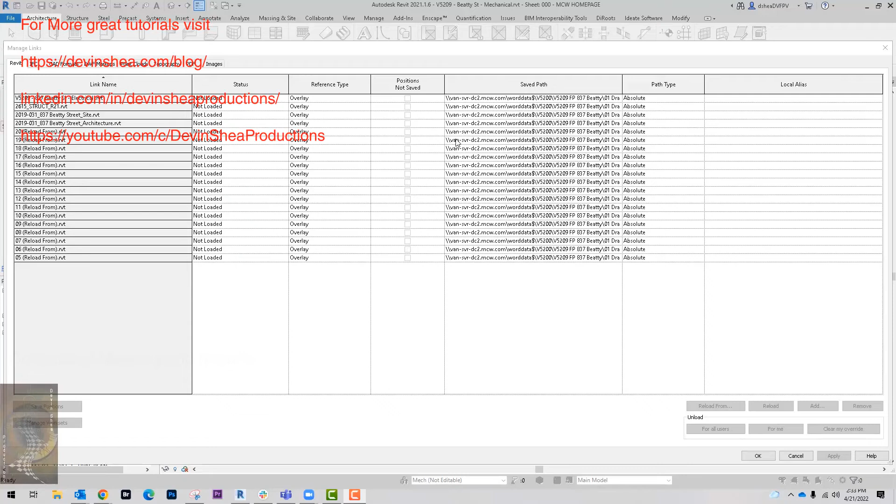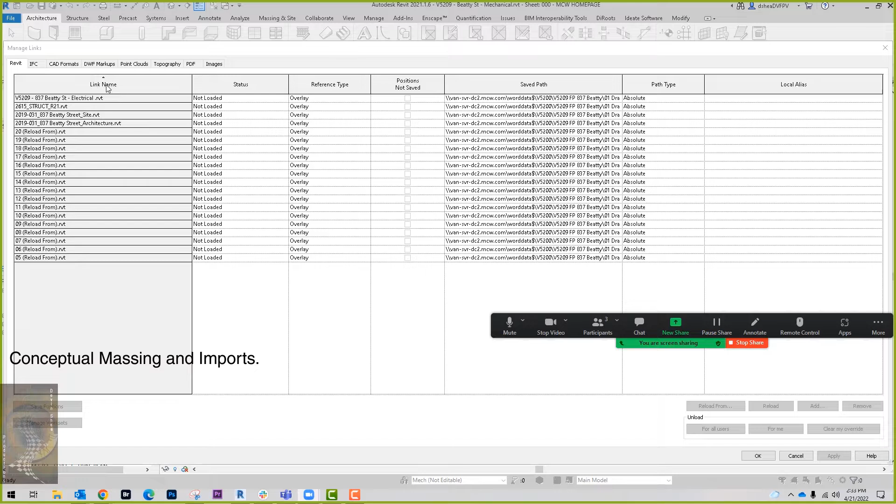Okay, yeah, I got you. Thanks for your patience. I was just on the phone with Tim, and he's getting us the drawing review tomorrow. Oh, that's great, so he had it and they were working on it, but he hadn't really responded. Good job, Tim.

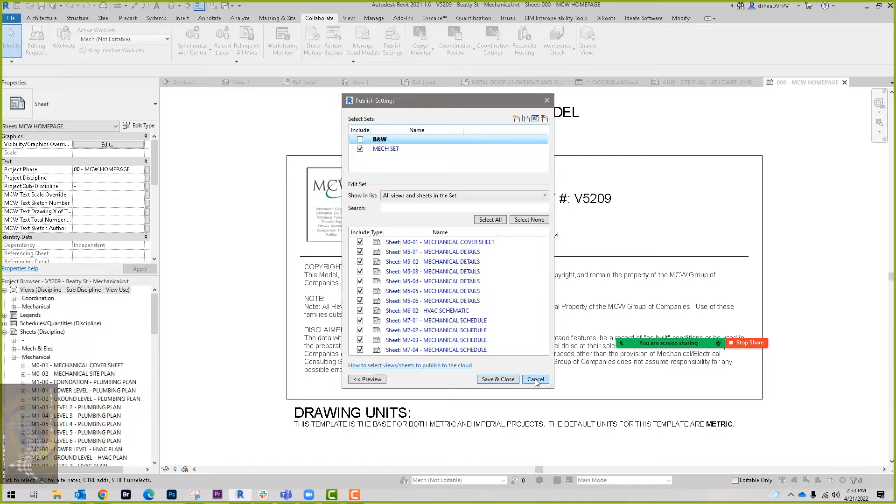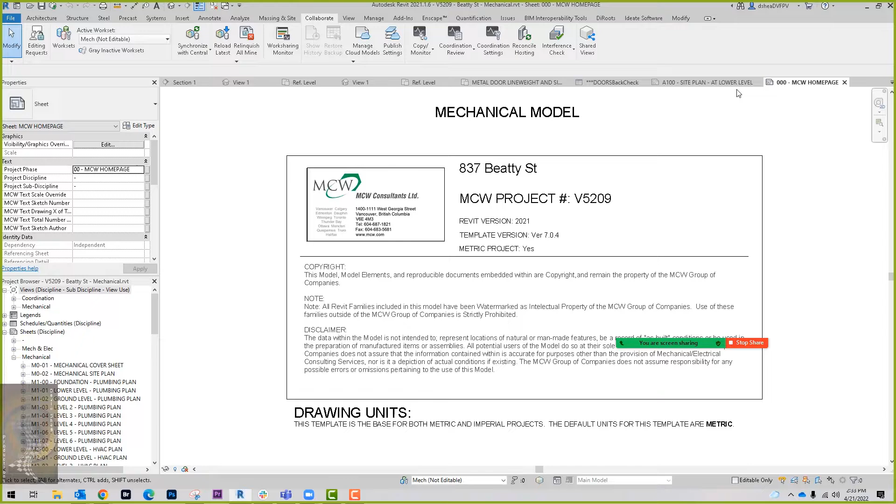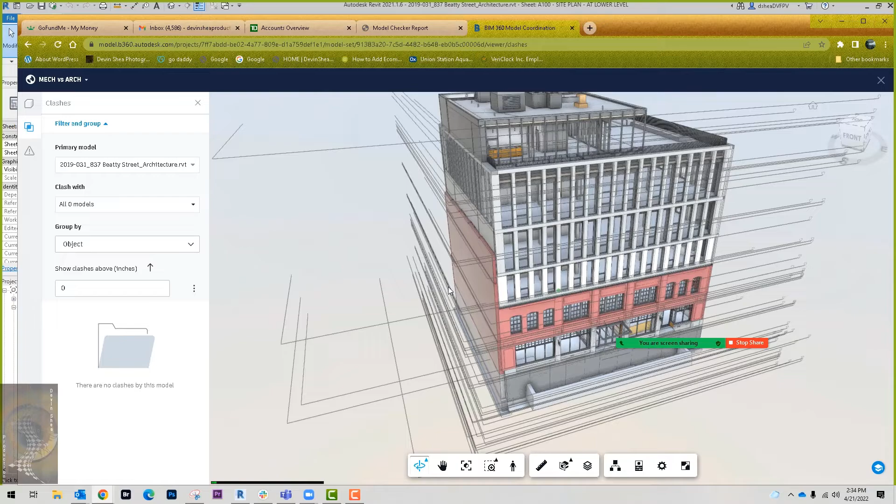Devin, thanks for making some time to chat with us, and I think Mike's joining as well. We recently had a whole series of updated consultant models, and you were helpfully getting them in order for us. I wanted to make sure we understood the process you were using for mechanical and electrical, which I think is one process, and then structural, which is a different process using more advanced BIM 360 capabilities we hadn't really explored as a team before. I thought it was important for Rocio and I to understand it, since Rocio has primarily been managing the consultant models for the life of the project, and we may have more coordination to do as we get into IFC and throughout CA. I was hoping you could walk us through and let us ask questions. Mike, I don't know if you have anything to add.

I think the process works going further as well. I'm just kind of going into this cold here. Devin and I haven't had a chance to catch up. So yeah, go ahead, Devin.

First of all, I'm glad you asked, because you guys have had this thing going just because of COVID, and it's basically the most advanced construction collaboration system on the earth, and I like it a whole bunch, don't I, Mike?

Yep. So anyway, also, is it okay if I record this? I've been wanting to show this process to other people as well, so figured it'd be a good opportunity to record if that's okay with you guys. It's fine with me. Yeah.

Okay, so first of all, just to really quickly fly through the document management system. Basically, when we set up the cloud, we set up teams, and then we assign each team to specific people. You can do different permission things so they can't download ours, or we can't download theirs, or vice versa. Once you set this up, we also have design collaboration, model collaboration, and this insight thing, which just shows you statistics about boring stuff.

And then when you go up here to this manage cloud model - every time, it's Ryan, right, with Fast + Epp, is his name, right? Yep. I always get my two structural guys confused because we have another project with another structural guy that wants this too.

But you just go up here and press this button right here, which means if there's any changes in the model, it will publish the new sheets and that 3D view, and then it goes up to the cloud.

So you just have to hit two buttons, and then you come over here, and whenever you hit that button, you see these little buttons, these little circle things. Can you see my screen? So every time we press publish, this little circle will show up.

And then the structural team - notice there's only us and the structural guy having these up here. So we just click this button right here, which means create a package. And then you go down here and you can add whatever you want to the package.

Oh, come on, weak. Sorry. Got signed out.

Come back over here. Okay, so I press the button, and then you go over here. The easiest way is just to go to your sets and then press this button, and that's all I did for Ryan the other day.

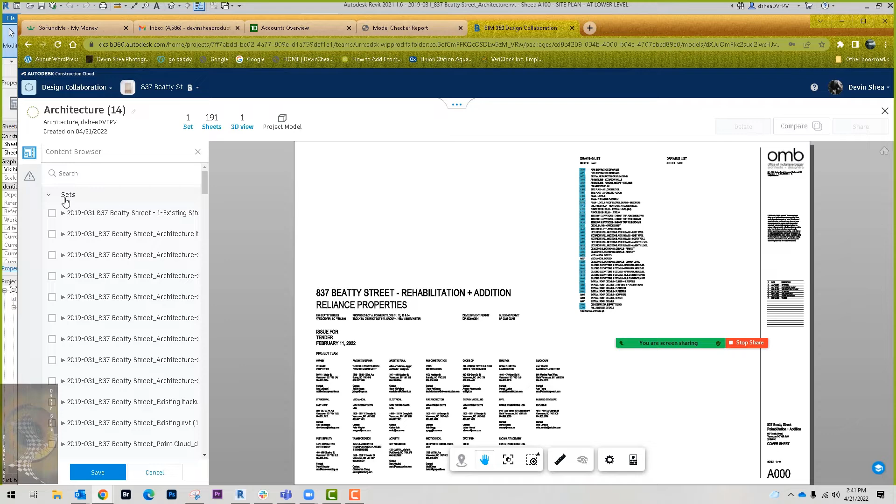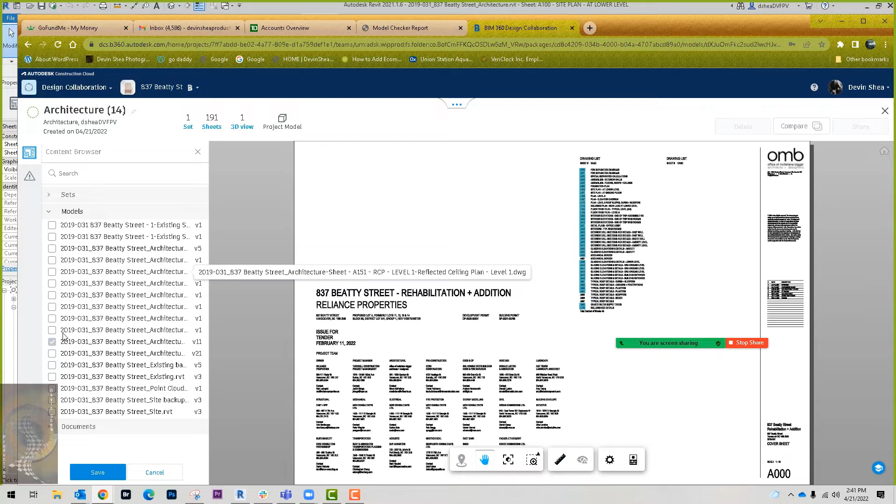But notice how in here, you can add all this stuff from AutoCAD drawings and things that are hanging out in the cloud. So you can add basically any of these things, and when I say add the model, this is just the 3D model with that 3D view that will show up in the cloud.

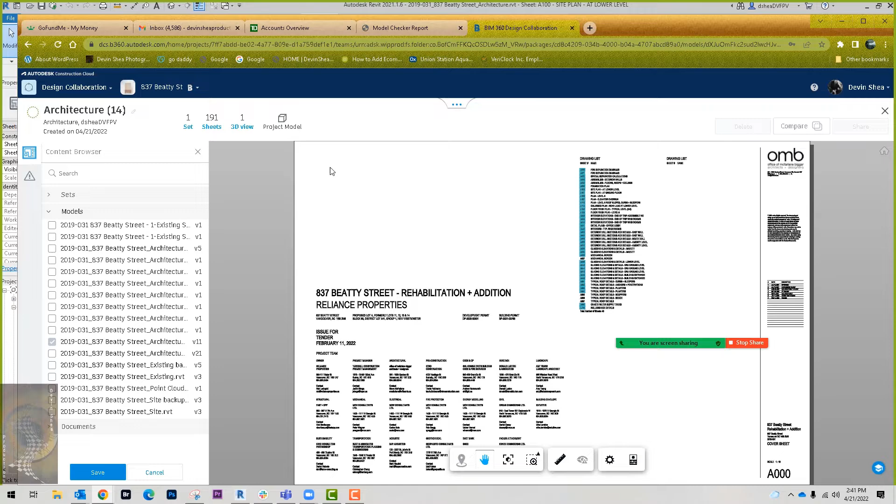And if I press this button - shut up - if I press this button, it goes to the 3D model of the project. So this is that 3D coordination view that I have set up.

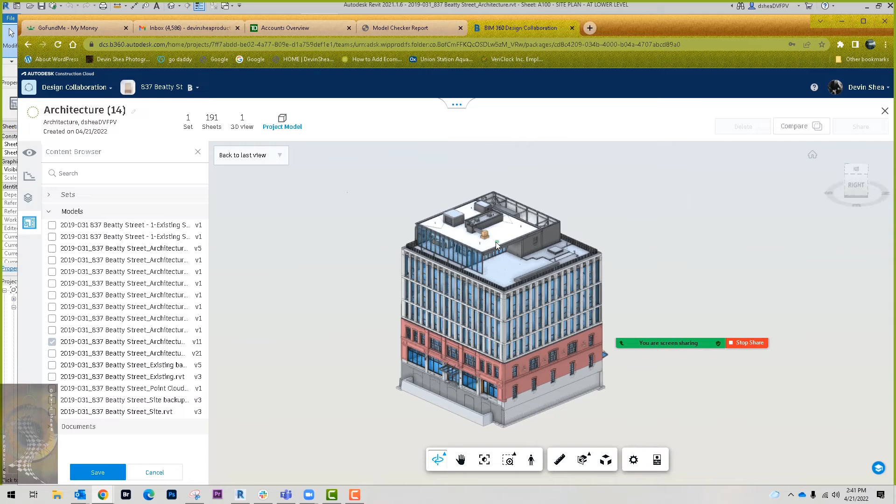Notice how you can't see any of the mechanical or anything because I had those turned off in my view. So also anyone that's in the project can go to the document management after you publish it, because you just have to press that button that sends it up to the cloud.

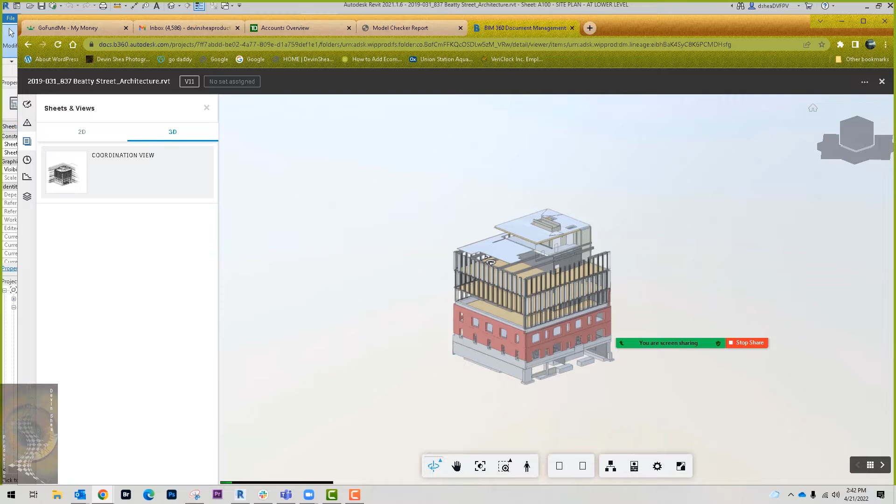So if I just go over here and click on your file, it will have the 3D coordination view right here, and then it will have all the sheets and stuff as well. So this is how you use the cloud for CA.

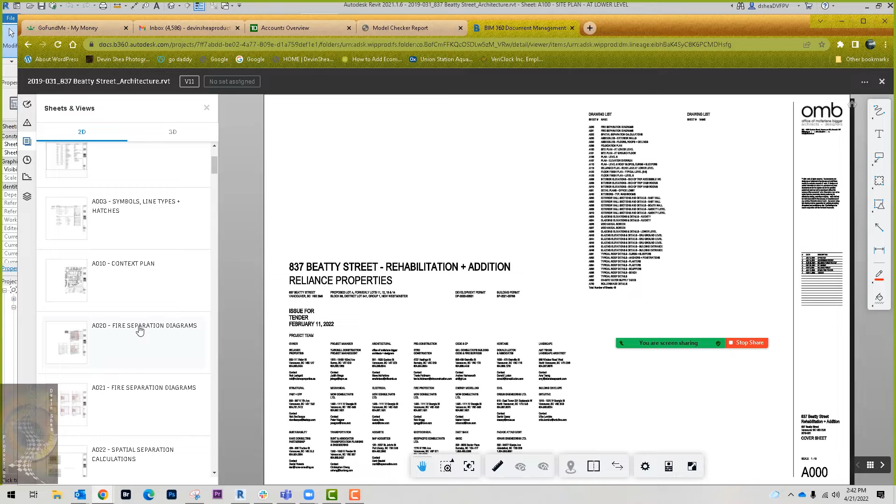Because I can just go here, and when I click on this, it's basically a copy. It's like a PDF, but it's way smarter than a PDF. So you can go up here, I'll just click this guy, and what you can do - see how I'm clicking things in here?

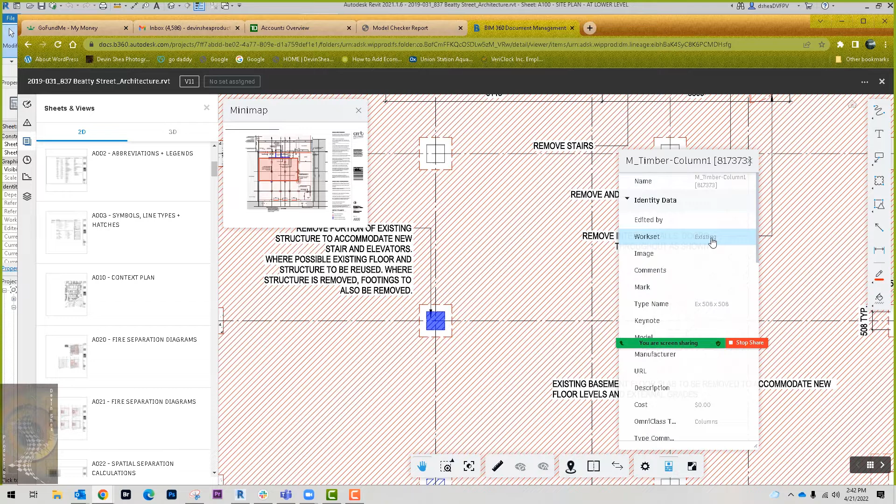So you can actually click on things that are coming from the model. So this is a floor plan. I can click this thing here, and I can go to properties, phasing, and then it literally tells me what phase it's on, what information it is, what size of the column, yada yada yada.

So this is kind of just like using Bluebeam, but it's way better because you're actually kind of interacting with it live. So it's like a PDF, but it's way smarter.

So any of your project team, the mechanical and electrical guys, even though they don't have that extra open-it-from-the-cloud thing that costs another $1,000, they can still go in here and look at the stuff.

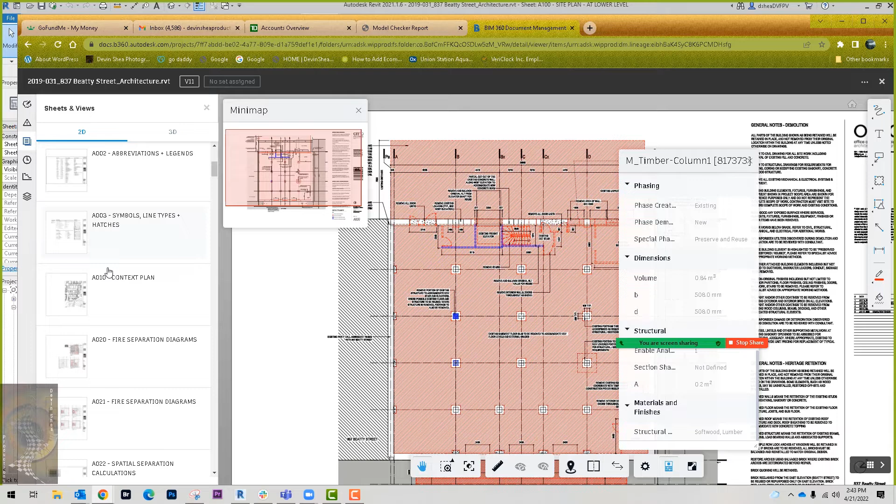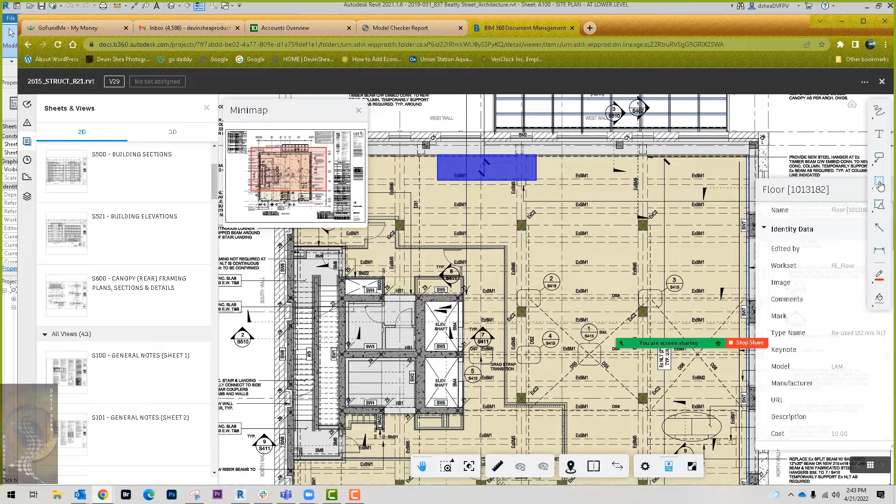So if I go on the flip side, if I go down here to structural and I click on this, these are all his sheets right here. So I can just quickly go into his sheets, click on that, go to here, and then you can also put markups and stuff like that.

And if we go back to ours, see how this has markups and issues right here? Do you guys remember making markups and issues on that? That was a trick question. I did that, I was just trying to show you what that was.

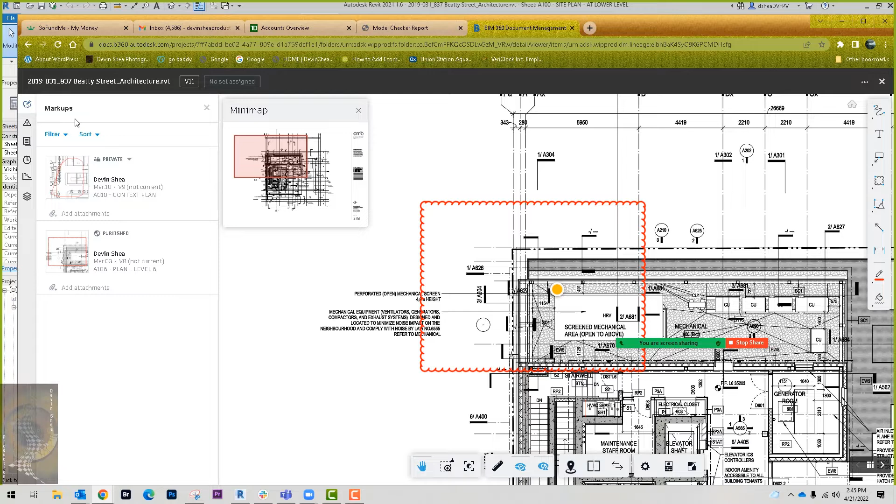But whenever I click it on here and I go to issues, see how I just, hey Brian, see how cool I am? So I sent you this a long time ago because I just wanted you to look at it. In here you can do, it's just like Bluebeam, but it's way smarter because I can literally put a little dot on here, and here's the markup. Then you click this little dot, and you can come up here and type a response or whatever, and the cloud remembers all of these issues and markups. So here is a couple markups that I just made a while ago.

Circle. So that's pretty much it. If you were using this for CA, it's a little bit more involved because you have to know how to manage your markups and your issues and stuff like that.

Hey Devin, on those BIM 360 sheets, how do you convert those to PDFs? You just press print.

Come up here. There's somewhere there's a print button. I haven't done it in a while. But yeah, you can just, sorry, yeah, somewhere in there's just a simple print function. I think it's export actually.

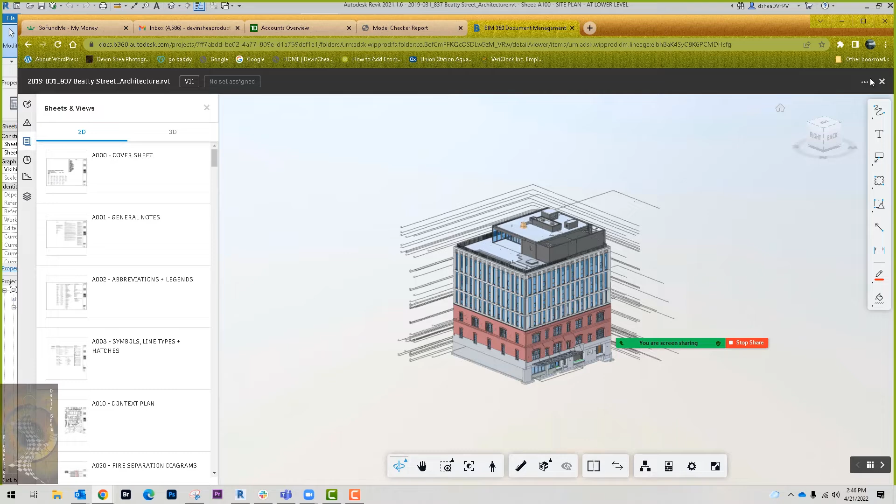Yeah, I'm not sure you can. It would be new if there was that feature, but yeah, I think it's one of those Autodesk things that is pretty contained within their sandbox. Oh okay, I think you have to add that to the plans, or yeah, when you make a, yeah okay. Anyway, we'll cross that bridge when we get there.

This is how you set up a transmittal. So you can just e-transmit that through the plans, but you have to have that set up in plans, I believe.

So I can go create transmittals, architecture, this one. Okay, I guess you can do it this way too. And this would send a transmittal, and then it would send whatever sheets you have in your set that we published.

So I don't still understand, like when Ryan tells us that they have a new model, usually he sends us some kind of BIM 360 link, right? Yeah sorry, I forgot that part. Or does he just tell us that they've published a new model?

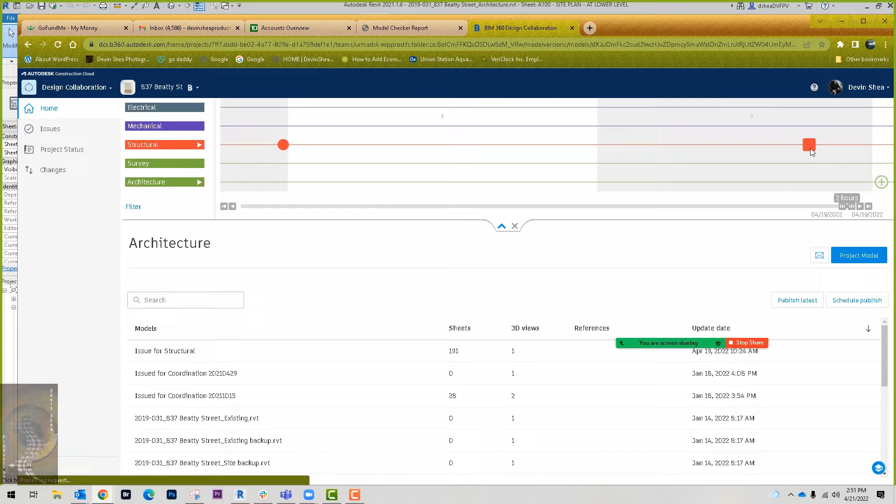But you have to manually go up here through the design collaboration tab and share. So when I click on this guy here... whenever he sends you that email, basically he's saying that I published a new one, or a package for you, and the square means that is the package that he sent.

See how it says consumed on 4/19? All I did is I went in here and clicked the square, and when you do it for the first time, there's a button that will show up saying consume. You just click that button and it automatically downloads that into the folder we were just looking at - though to clarify, it doesn't actually download, it just moves it in the BIM 360 folders in the cloud, nothing downloaded yet.

The intent there is that because the folder that lives in the structural folder is actually structural's file, we have control over when we update our version of their file. We can elect to consume it right when they issue it, or the following week, or whenever we want. It will only update in our model once we consume the package.

A point of clarification: that particular file that Structural has published for us to consume isn't their working model. It is their published version - in the same manner that we prepared a consumable package for Structural, they're preparing a package for us to consume. So it is a copy of their model, not a live link.

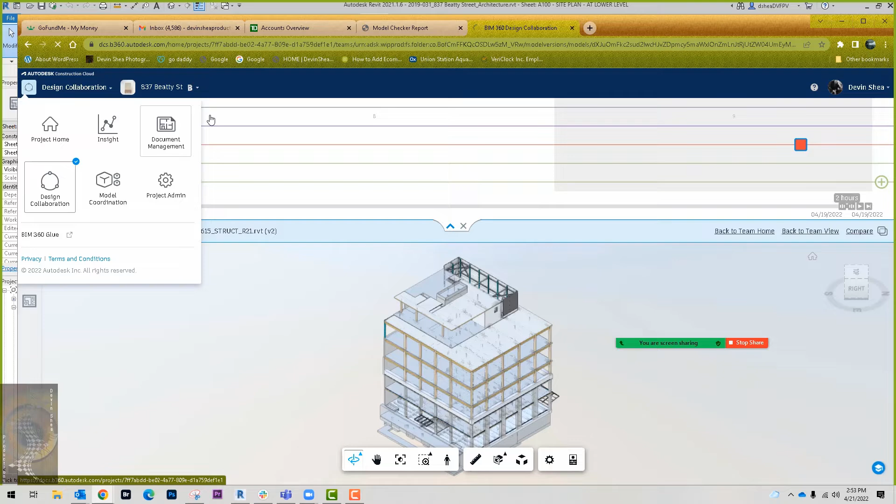In that case, what is the advantage between not using... if I understand, the model that is in the structural folder that is not in the consume folder is the published package for us to use. So what is the advantage between not using that one like before, and now having to go to design collaboration and push, being aware if we clicked the square so we're working with the latest model, versus relying on the original file that updates automatically as soon as you open it with Revit?

Do you guys remember that one time where he freaked out because I was messing with his file? Remember that, Brian? I do. The reason I was messing with that is because - I'm not supposed to be able to go in and open his file, normally we have restrictions on that. So that's why he was like 'what are you doing?' I said 'oh I'm sorry, that is your live file,' because it was linked to that one. So I thought that's why I got all confused.

But so the difference is, technically we're not supposed to be able to open his file - that's a permission thing. So therefore you never link to his file, because he might be working on it, and if we hit refresh reload while he's in the process of changing an entire parkade floor ramp, and that ramp disappears, we'd be like 'what the hell, where'd this ramp go?' Oh, I was not working on that.

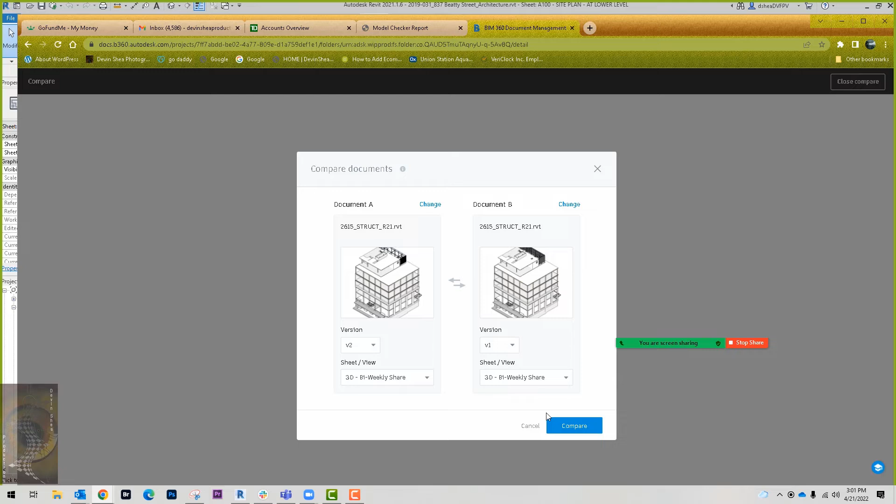I always like the compare versions feature here because you can literally go in and see how he set up his weekly share. The nice thing about the cloud is it saves everything, so every time we press publish, it tells you what's added or removed between sessions.

So sometimes you get into those little arguments like, I swear I put that up there, and yeah, I'll fix that. But you can literally go back here and see, oh, on this date this truss was removed, and that's why it's messed up, and then they'll write that down and go fix it.

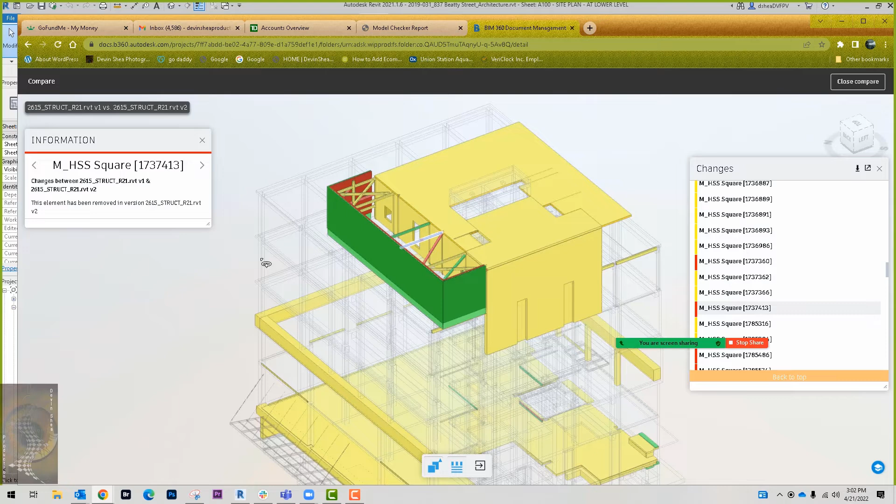But these things are really nice. To support what Devin's saying, because you can't delete what's been published and consumed, in combination with this comparison, there's a level of accountability that's trackable.

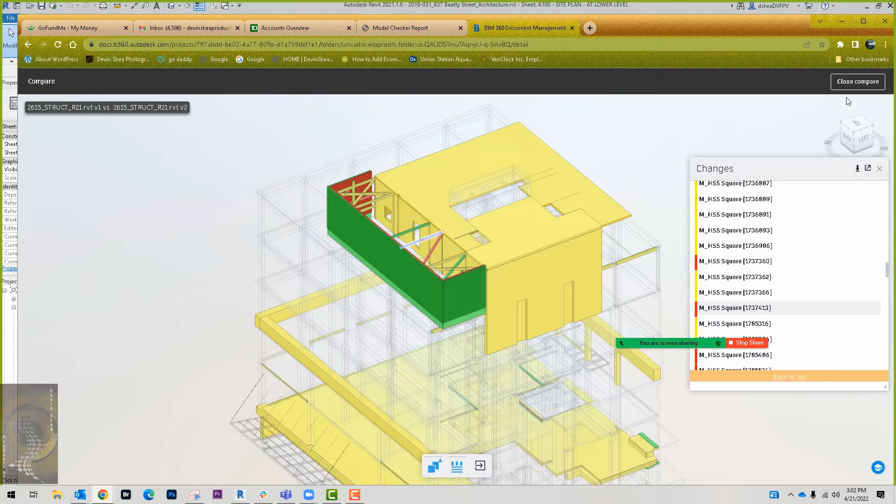So this is kind of like the list of changes or revisions in one image. Because those lovely conversations where you're always like, no, you were supposed to do that, I was supposed to do this, you've been in one of those arguments before, right? This allows you to go back and say, oh look, that was actually deleted by you. So those are the fun conversations you get into.

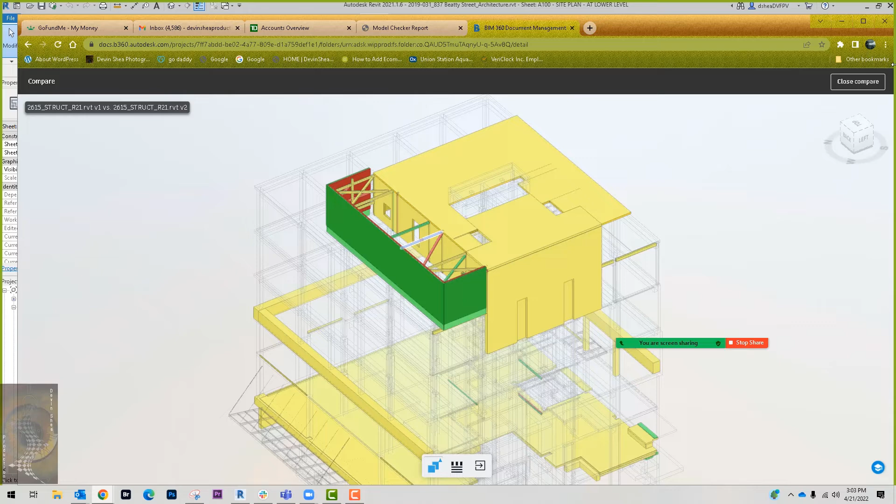And on ours we can do that as well, so you can go back here. These are all of the versions we have. Technically there's like 25 or 30 of these, but this is the one that I accidentally overwrote and killed the version history, and Mike was not happy with me on that one.

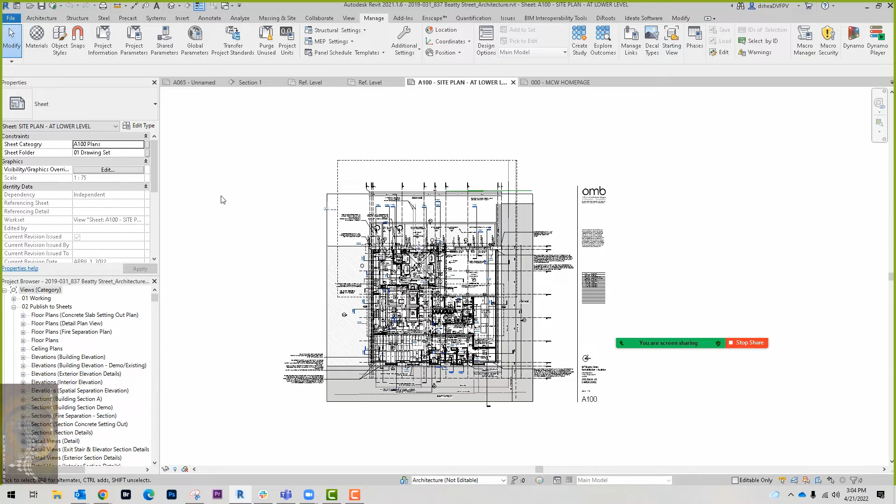And then you just have to reload your link, through Revit, reload the link, just refresh that. All your versioning is sitting there, so you don't need to worry about renaming files or anything, if it's a Revit user that uses BIM 360. It's all just sitting there ready for you in the ideal world where everyone uses BIM 360, but we're not there yet.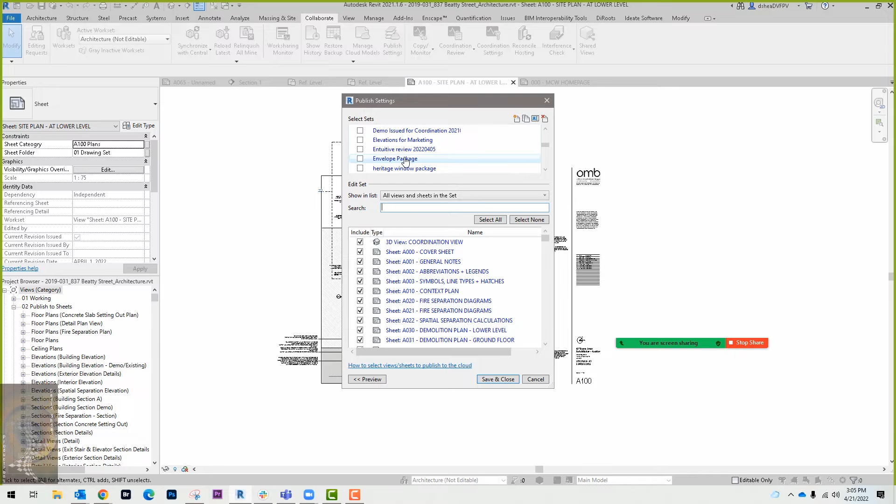Thanks, okay, so it's the day that we're transmitting models, and I or Rocio can do this as well. So I go into publish settings first, and since you guys aren't using the 2D sheets, you really don't even need to do this part. But as long as you have this view set up, that's the important one, because that's the 3D view that shows up on the cloud. We're also setting that up, I had it set up with clash detection, but they deleted my view in the mechanical and electrical.

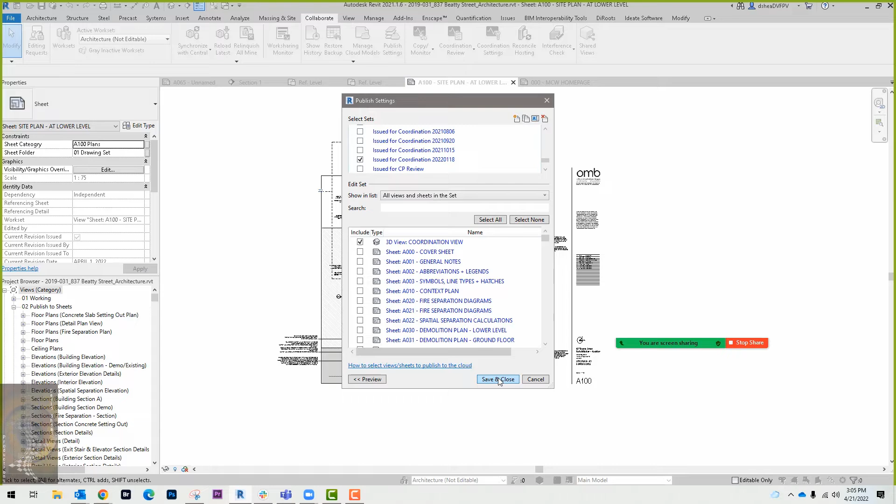So then you would go, okay, I'm doing issue, this one, whatever, save and close. So would we create a new issue every time that we publish? No, you don't need to do that.

So if you are using 2D sheets instead of Bluebeam, then you have to do that, because when you're doing an addendum you're only sending out like 6 sheets or whatever, so you just want those showing up in that addendum. So you would do that, because it would show on the cloud what sheets are in addendum 3 versus IFC or whatever.

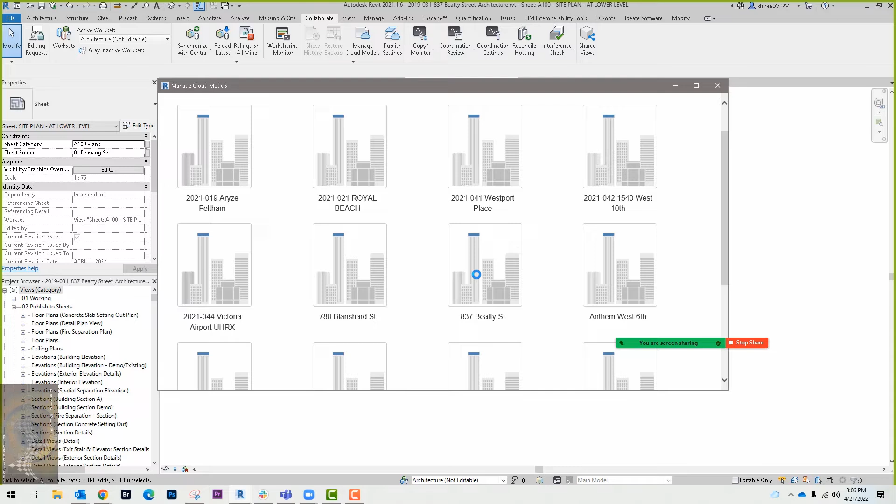Really you don't have to do anything, because I already have it turned on for you. So you just go up here to Manage Cloud Models. Step 1, go to Manage Cloud Models. Go to your project, which you should only have one in your dashboard, because I'm just on every project. So you go to your project, and you go here, you hit this little button.

This first file that you are hitting is the backup, so you go to the second line. Oh yes, sorry, good eye.

So yeah, see that little up arrow thing? That will publish your changes.

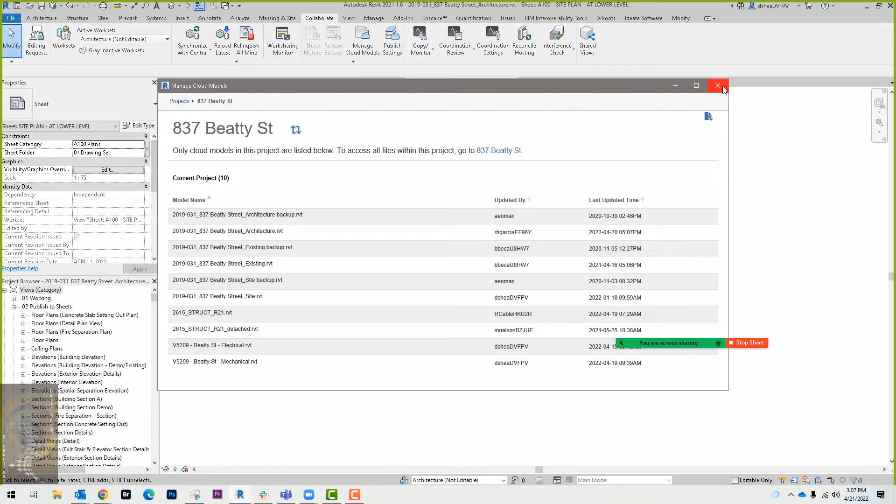So for instance, in my 3D model or whichever 3D view I have set up, let's say you put in a Ferris wheel inside your model, because I actually worked on a project and we put a Ferris wheel in there. You have to have that visible, or else you can't see it on the cloud, and he can't see the Ferris wheel until you go up here and hit this Manage Cloud Model button, and then send it to the cloud for publishing, basically.

So you go in here, go to Beatty Street, go to your model, hit that up arrow, and then it goes up to the cloud and takes a minute to process. Normally you do this the day before, and it will be done when you come in the next day. Usually it only takes about 30 minutes to an hour.

So there'll be a little spinny wheel right here that tells you it's still processing. Once that's done spinning, you go over here to the Design Collaboration tab. Every time you press that button, you always have to hit this thing up here to make the timeline pop down, and then every time you press that button, it gives you this little thing.

Zoom in. So this is just a 421. Did anybody press that button today, or I guess not? This just tells you that there are changes or whatever. I did that because I pressed this button, possibly because I had not been working on Revit today.

Okay, I think that was because I hit this button earlier. But anyway, you see this little plus button, which means create a new package. I was in Revit and did sync, and that makes the circle dashed. But when we press the Manage Cloud Model up arrow thing, it becomes a solid circle, and when you press Create a Package, it becomes a square.

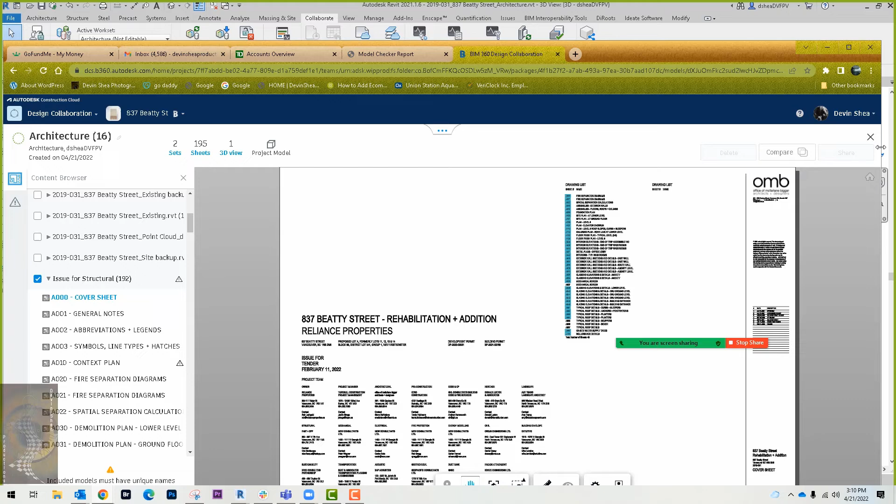Anyway, so you click this and then you hit this share button and you're done. So you go up here to Design Collaboration, hit this plus. All you do: rewind again, Manage Cloud Models, hit the up button, go to your Design Collaboration, hit this square, select what set or model you want to send him, and then press share. Then he comes along and presses the consume button, right here, and in the opposite way he just presses consume, it copies it over to his consume folder, then he goes into Revit, reloads that link, and you're done.

So the whole process takes you about 2 minutes once you've done it a couple times.

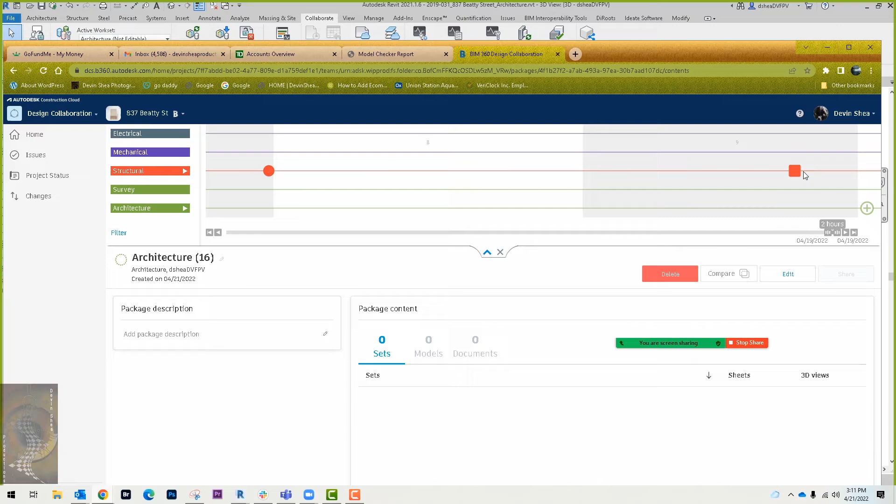When we are bringing the updated structural model, it's exactly the same process, but in that case you will have the structural label here with that square button, and we just press that button. You go up here and literally click it like this. I've already consumed it, that's why it's not showing up right here. When you click this square, you'll see consume right here, and all you do is click the button and it does it all for you.

And then you just have to reload your link in Revit. And I can write down all the steps for you if you want. Mechanical and electrical, that is a different system. We are still doing...

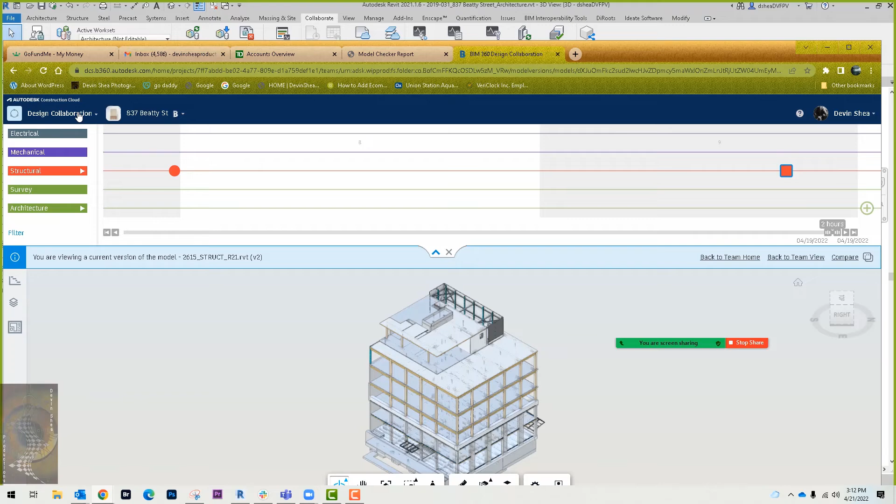So I understand that the thing we have been doing is whenever we receive the model from Dropbox, you are just uploading it into the cloud, so that it's in the document management, so they have it. So what I have to do is I literally go here, hit Design Collaboration, and go down to mechanical. It's a little ghetto because I have to click here and then delete the thing, and then I just open the model and send it up to the cloud.

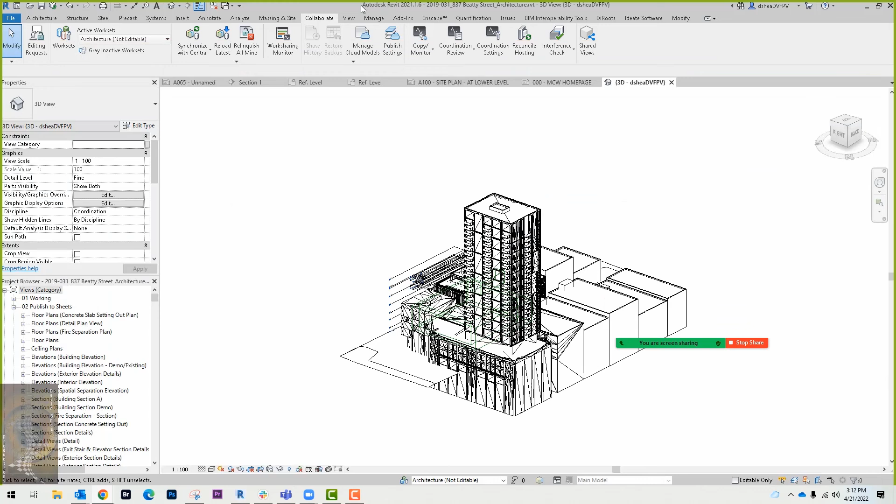So I think I actually opened that thing just now. When you say you open the model, why do you open it? Because, why don't you just upload the file? It has to be uploaded like that for it to be a live linking thing, if I'm saying that right. You have to do it that way. Well, I guess you don't have to do it that way. I think you have to. I think you just upload the file into the cloud, and that's it, and that is the link.

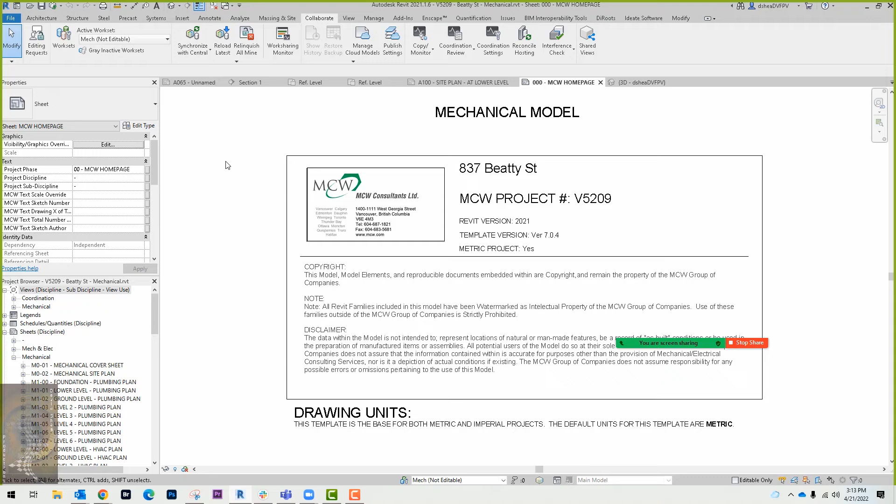So I would prefer not to have to open any consultant file. For me, any file that I receive from a consultant is sacred. So it's kind of like I just link it. I don't deal with the file. I don't open the file.

Yeah, I think I was doing that because technically you can just go to upload here, but you do have to delete it first, because if they're the same name, it won't let you do that. Oh, that's why I have to open it and rename it, I don't know, I was just doing that out of habit. I would prefer not to open any consultant file.

Okay, yeah, because where do we upload them to? Do we upload them to ours? Shouldn't our consumed folder have mechanical and electrical subfolders? No, because the consumed folder is only for when you use that function. So if I go to electrical and click consumed, see how there's nothing there? Because that team has to actually hit the consume button for it to go into the folder.

Within our architecture folder, what's in our consumed folder? Only structural. Yeah, if you might, next time you talk to these guys, you might ask them to go here — I don't know if they've even ever opened this thing, but they can totally use it just as a file, like a Dropbox, because they can upload it just like I did. They still should be able to go up here, because I did give them permission on the design collaboration, so they should still be able to go up here and click our folder over here and then consume it.

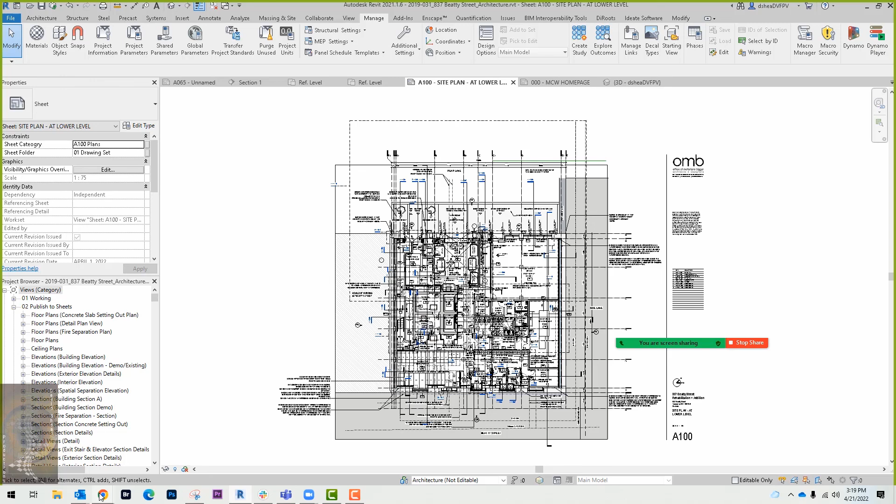And then when you talk to those guys again, just ask them if they've ever turned that on, if they've ever gone to BIM 360 and looked at it at all. The M&E guys, you mean? Yeah, the mechanical and MCW or whatever. And then just ask them if they've even used it, because they have total access to this, so they could use it.

Cool, yep, all right, thank you.

What do you think, Rodrigo? Is that good for now? We'll just wait for the next one.

I think it'd be good to do a walkthrough next time. Yeah, I think that is clear, it was just easier for me to do it because you've never actually pressed the buttons before. But next time we go through that and he sends you another one, then I'll walk through it with you, and you can do it next time.

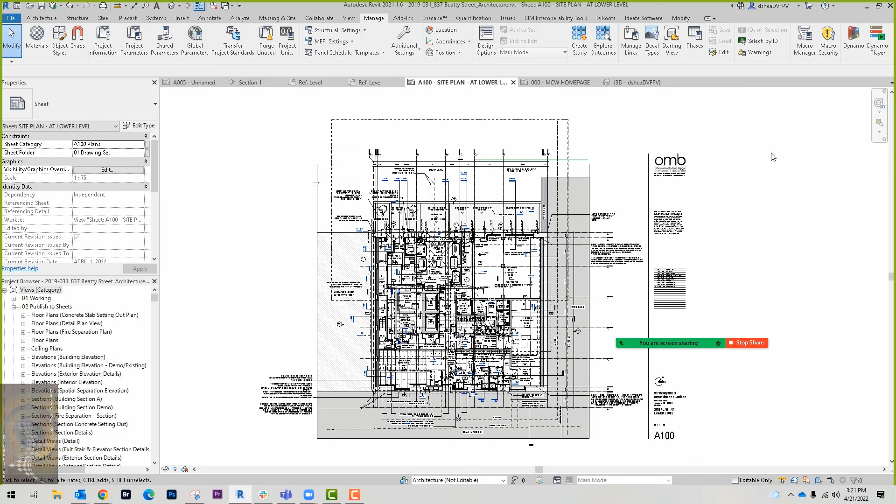Sounds good, cool, okay, thank you. Appreciate your time. Yep.